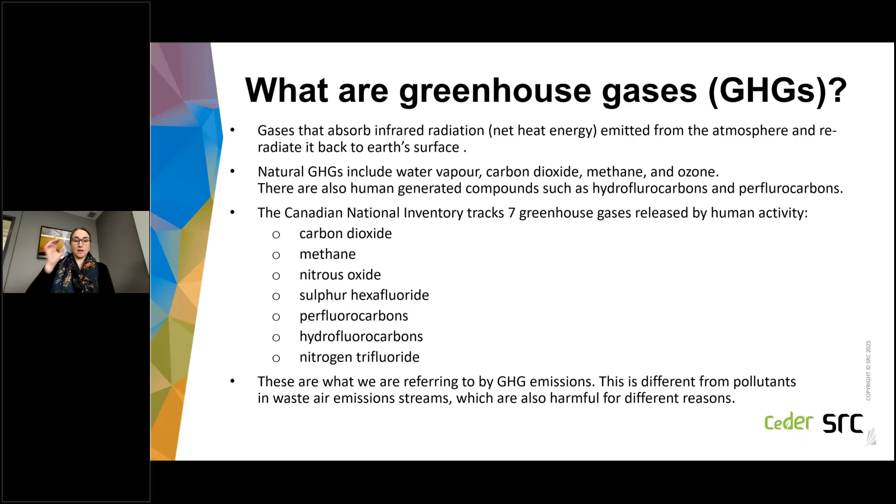So a couple of other terms I'd like to explain: climate mitigation. This involves avoiding and/or reducing emissions released into the atmosphere. Reducing those emissions can involve changing to processes or energy sources that emit less greenhouse gases, or capturing emitted GHGs to prevent their release. This can be done on an individual site basis, a project basis, a company basis, a jurisdictional basis, or an industry-wide basis. It is reducing what is in our control.

Climate adaptation, however, is the process of adjusting to actual or expected climate changes and their effects that are out of our control, in order to minimize the negative impacts and potentially take advantage of any opportunities that may arise from the scenario. So climate adaptation is focused on impacts of climate dynamics and adapting to them.

That can be related to water security. It can be related to site or industry preparedness for extreme weather like floods or fire, developing alternative vegetation plans that are adapted to new climate situations.

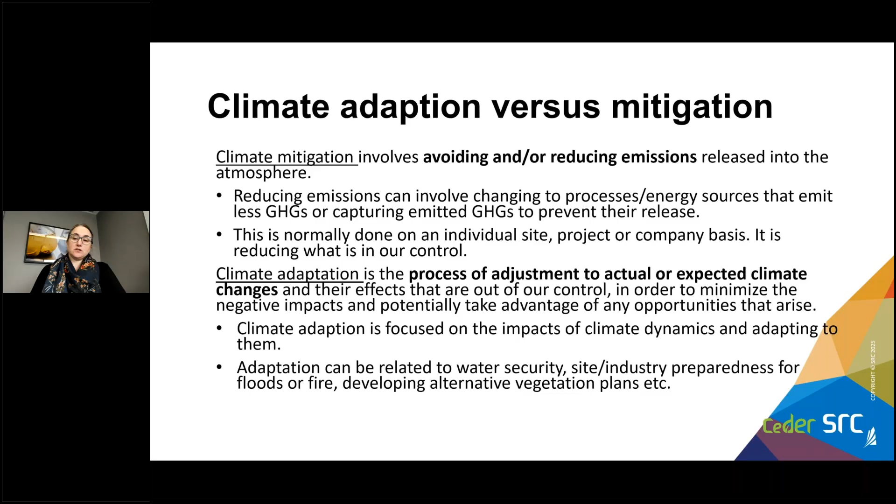So one other term I'd like to define is carbon dioxide equivalent. You might see this written as CO2e or sometimes as CO2eq. What this really is, is a basis that allows us to compare different greenhouse gases on the same basis. The formula for this is really: you take your amount of gas and multiply it by your global warming potential.

Different greenhouse gases have different global warming potentials. Often this potential is a number calculated over 100 years, though you might see numbers over 20 years. But the point here is that these different greenhouse gases have different GWP. This table here on the right shows that methane's GWP is 28 times that of carbon dioxide. So what that means is if you have the same mass of methane as carbon dioxide, the impact of that methane will be 28 times greater. This just allows us to compare different greenhouse gases on a standard basis when we're looking at our emissions.

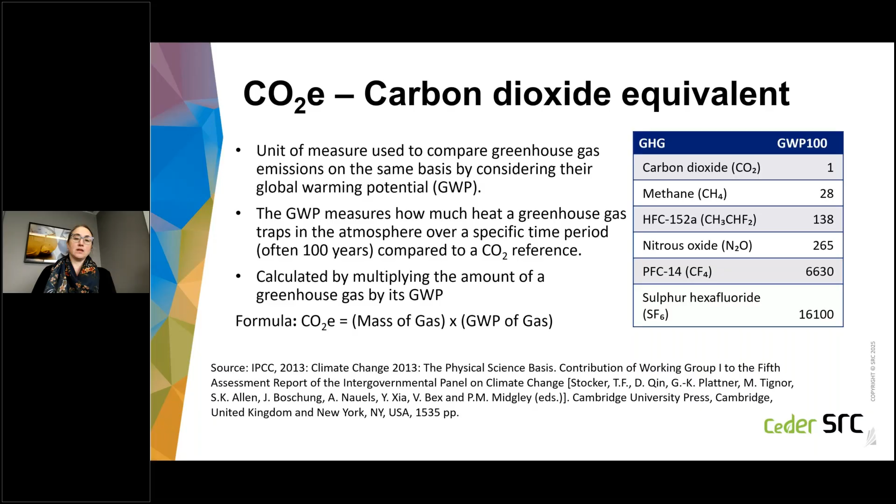So a couple of carbon reporting concepts for everybody. Carbon reporting refers to the reporting of greenhouse gas emissions using CO2 equivalent. Many jurisdictions do require reporting on greenhouse gas emissions in order to measure and claim impact of any reduction measures.

Another term you may have heard but not be familiar with is life cycle assessment, or LCA. This is a method of measuring environmental impacts across a product's life cycle, what we call a cradle to grave analysis of a product. These impacts do include greenhouse gas emissions, so part of the LCA is your carbon footprint, but it also includes energy consumption, water usage, and waste generation.

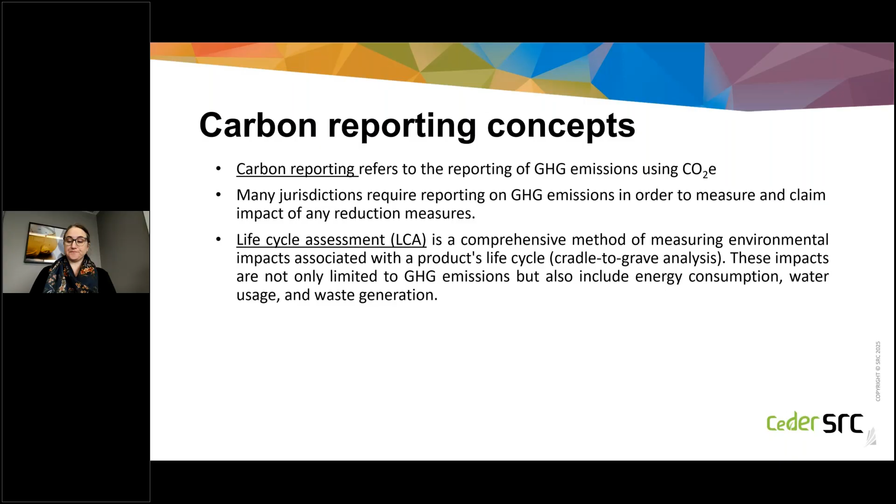One other carbon reporting concept I'd like to explain is scope 1, 2, and 3 emissions. These are categories used to describe an organization's greenhouse gas emissions footprint based on their point of origin. Scope 1 emissions are probably what people are most familiar with. These are direct emissions that are owned or controlled by a company, so they can be managed as desired.

Scope 2 emissions are actually indirect emissions. These are from purchased energy sources, such as electricity you need to purchase, energy for heat, cooling, or steam for company operations. These are typically managed by using lower carbon intensity and renewable energy sources, which is one route to reducing those types of emissions.

However, there are also scope 3 emissions. These are another source of indirect emissions from sources that are not owned or controlled by the company that's looking at their carbon reporting, such as supply chains and stakeholder relationships. The concept of scope 3 emissions can be a little bit confusing to define, so I'm going to give you an example here.

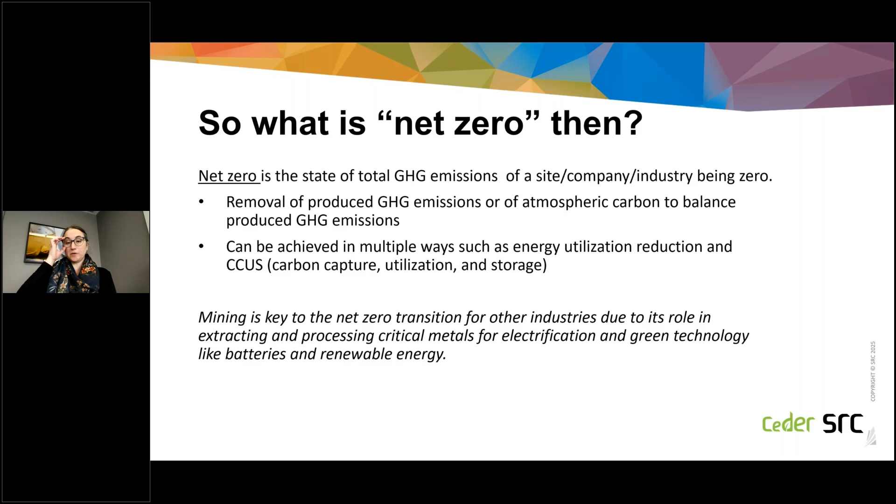So what do I mean by CCUS? That stands for carbon capture, utilization, and storage. I have it here as 'and/or storage' because although it's all one term, we are not always doing all of these steps. Capture means removing carbon dioxide either from industrial greenhouse gas emission sources—one example being flue gas from combustion—or from the atmosphere.

Utilization is taking the CO2 we've captured and using it in other processes that need CO2, or converting it to other useful products—I'll talk about examples of both in a minute. Then storage is where we safely and permanently store that CO2 over a very, very long term—what we'd look at as making permanent.

So what about the term sequestration? I'm not really going to use sequestration in this presentation because it can get a little confusing. It's often used when talking about capturing CO2 from the atmosphere for a wide range of applications, and is frequently used with biological technologies and solutions. So I won't use it here—we'll keep to capture, utilization, and storage so it's clear what type of processes we're talking about.

Canadian and mining emissions context: how large are Canada's greenhouse gas emissions? In 2022, the most recent year we have numbers for from the Government of Canada, 708 megatons of carbon dioxide equivalent was emitted—an increase of just over 1% from 2021. Total greenhouse gas emissions from heavy industry were 89 megatons of carbon dioxide equivalent, and mining is part of heavy industry, so that isn't mining alone, that's all of heavy industry.

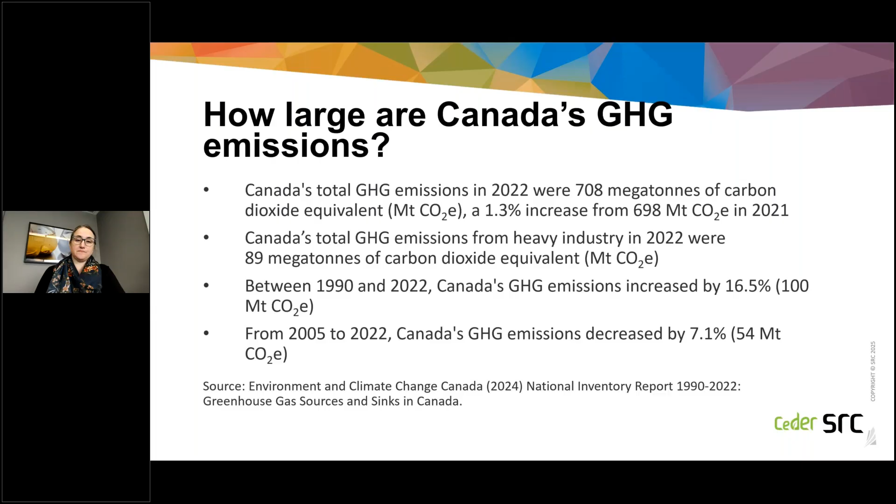So Canada's emission targets: Canadian and global regulations continue to evolve as targets become more aggressive and impact more industries. Canada has a 2030 emissions reduction plan, with the goal to achieve a 40% reduction below those 2005 levels by 2030, and net zero emissions by 2050. There are some new actions mentioned there for heavy industry, which includes mining.

Certainly additional emissions reduction efforts to decarbonize large emitters. But the other point here, which is something we're talking about in this particular webinar, is that the Government of Canada is looking for a comprehensive CCUS strategy.

They want to look at development and deployment of CCUS technologies to mitigate greenhouse gas emissions from a range of industrial sectors, which does include mining. And mining emissions are under scrutiny—public perception, stakeholders, and government are taking a look at increasing numbers of industries regarding their emissions. Also, many markets are asking for different greenhouse gas emissions data and targets. For example, if you want to sell your product to certain markets in Europe, you need to be reporting scope 1, 2, and 3 emissions as part of that product. So there are a lot of considerations even outside of existing regulations when it comes to greenhouse gas emissions targets for an individual company or industry.

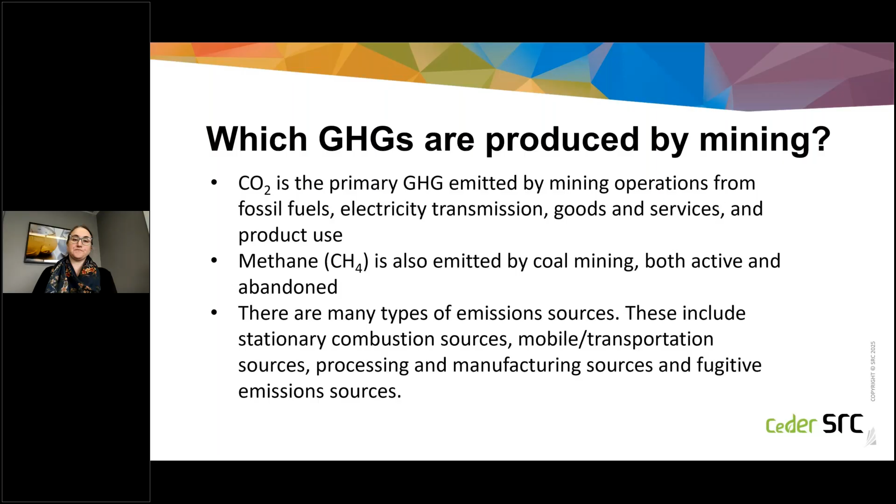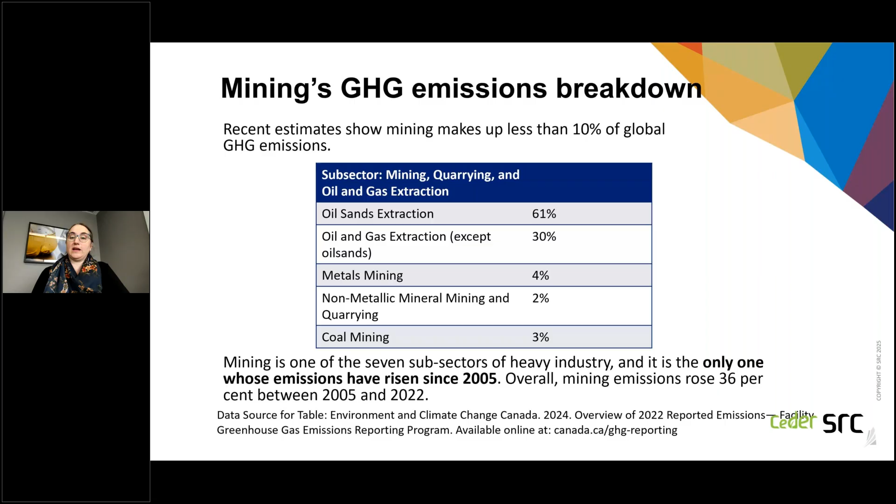One interesting thing to note is that emissions from mining have risen since 2005, while other types of emissions have been falling in Canada. Overall, they rose 36% between 2005 and 2022. So the question is, why have emissions from mining increased if industry has been investing in decarbonization and improving efficiency? In fact, emissions intensity has been reduced per unit of energy—that's the good news. But the reason we still have more emissions presently from mining is two reasons.

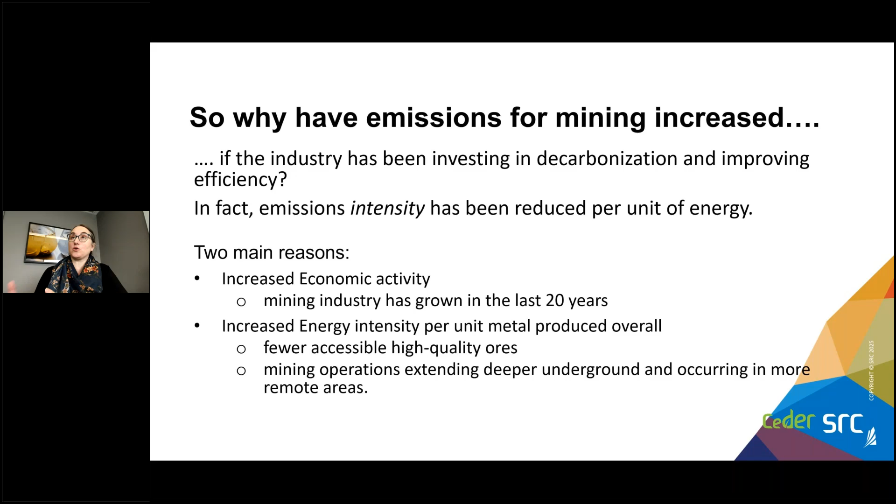Increased economic activity—the mining industry has absolutely grown significantly in the last 20 years, so we are doing more mining even if our emissions intensity is lower. And increased energy intensity per unit has also increased in many cases. We've got fewer accessible high quality ores. We have more mining operations that are extending deeper underground and occurring in more remote areas. Obviously there's some challenges with both of those that require additional energy usage.

So now moving on to decarbonization and beyond. What are we doing now in mining, and can we do more? The mining industry has definitely made progress in recent years towards decarbonization. We talked about energy intensity and emissions intensity on that last slide. Mining operations have reduced their emissions, and there's two major focuses that they've been using so far.

Looking at optimizing operations and equipment selection to minimize energy consumption, and switching to lower carbon intensity sources—so electrification and employing low carbon or net zero intensity energy sources. Finding efficiencies is an ongoing process, though, and it is especially challenging at remote mines.

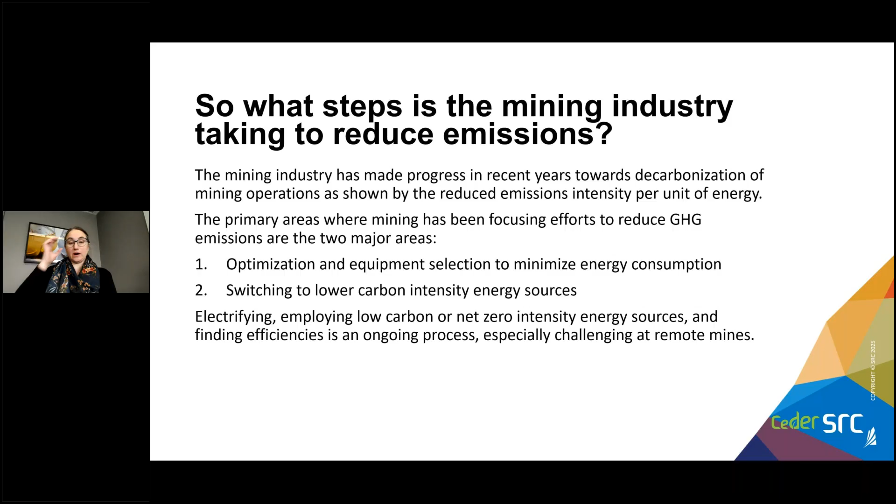So can we do more? Well, with regulations and public perception changing, we now need to look towards an integrated solution to GHG emissions reduction via more direct mitigation routes. And so that's where we bring in this capture, conversion, utilization, and storage.

Other industries have implemented these direct mitigation routes to meet regulations and targets. One example is oil and gas here in Canada with more recent methane regulations—they've been doing that through capture, utilization, and storage. Here I'm referring to CCUS because we talked about how CO2 is the primary emission for mining, but obviously you can do capture and utilization as well for methane.

Another approach is integrating industries or facilities to offset net emissions. This is where you integrate different types of industries or facilities together, where maybe one facility's waste product is another facility's feedstock, and that can be a route to reducing emissions.

Very key, what we're finding is integration of multiple strategies to optimize the resulting emissions reduction and economics. I don't want to forget about economics, and I'll bring those up again later because we always need to consider what is cost effective and practical when employing these technologies. So going forward, we can combine efficiency and low carbon energy sources with CCUS technologies to provide an integrated solution for reaching net zero.

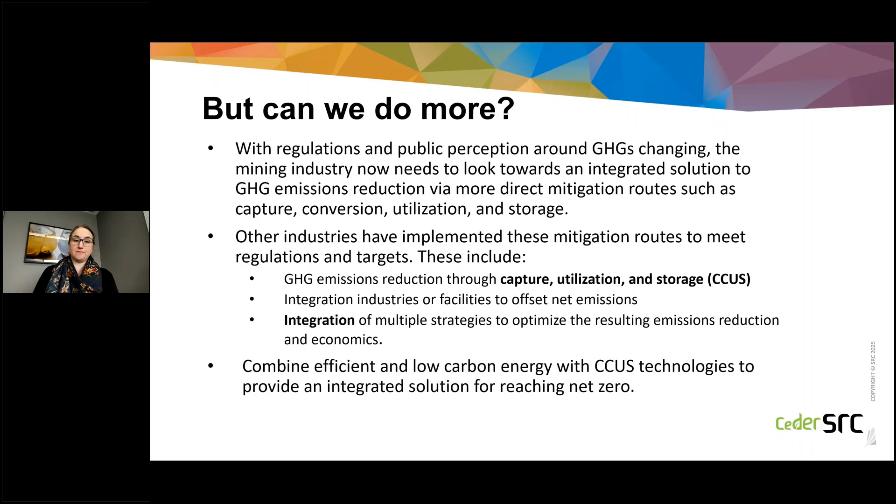Some examples of CCUS: capture of CO2. This is where we're looking at capturing industrial waste streams before they're released to the atmosphere, for example, carbon from fossil fuel combustion flue gas. These applications are simplest if you have a large point source versus a lot of small sources, so these are some of the considerations.

The other option for CO2 capture is extraction of CO2 from the atmosphere to offset produced emissions, so direct air capture. There are also quite a few land-based and ocean-based methods. I won't get into those here, but certainly accelerated weathering, afforestation, direct ocean removal, and microalgal cultivation are options for extraction of CO2 from the atmosphere.

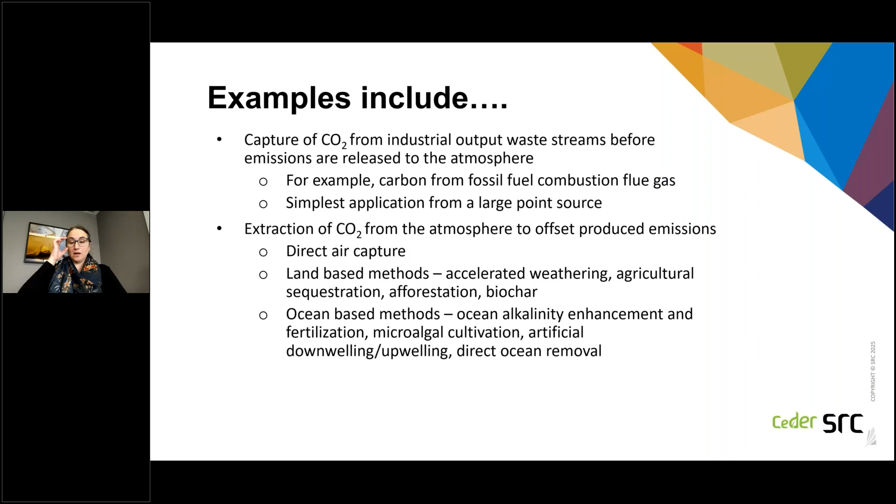I have a schematic here to sum up at a high level the approaches we can take in CCUS. We start from carbon capture, whether we're collecting our own GHG emissions or removing CO2 from the air to balance our emissions. We can take the route directly to storage, which would be geological storage long term.

The other option is utilization, that's the U in CCUS. So there's utilization for things like foods and beverages and enhanced oil recovery.

Now, the differences between storage, utilization, and conversion are sometimes not well defined. An example is enhanced oil recovery, which is utilization of CO2 to improve production from an oil and gas reservoir, but much of the CO2 actually remains in the reservoir, so it can also count as storage.

If we're not doing direct utilization, that is where we are converting - using the CO2 to make a useful product that may have value or may further offset our emissions, such as a feedstock for fuels, chemicals, and agricultural applications, to make cement, for backfill, as well as some biological approaches such as using microbes or microalgae to produce valuable products.

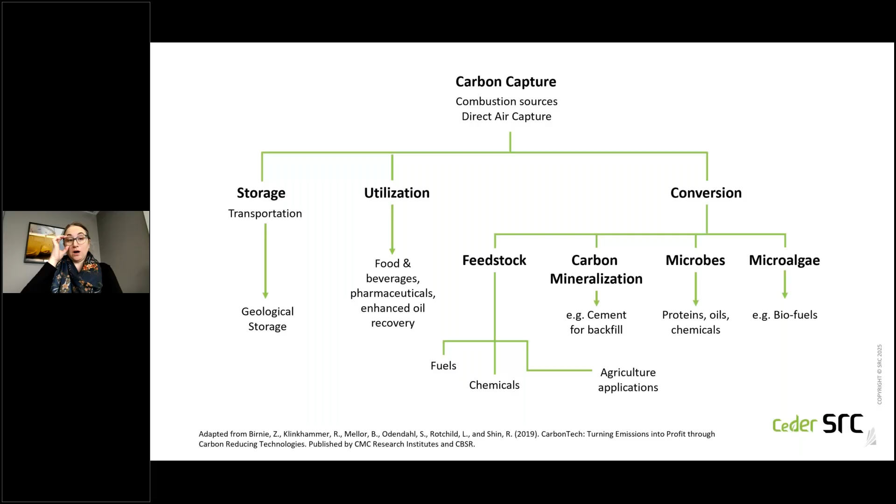On the topic of carbon utilization, I have another graph showing more examples of direct use versus indirect use. Direct use is utilization. Indirect use - we often use the term conversion - because we need to undertake some type of chemical process to convert our CO2 into something else we want to use, such as fuels, chemical intermediates, plastics, building materials, cement and concrete.

If we're using it directly, there are actually more applications than you might think: solvents for decaffeination and dry cleaning, as a heat transfer fluid, welding and medical uses, as well as, of course, yield boosting for things like greenhouses, fertilizer, and algae.

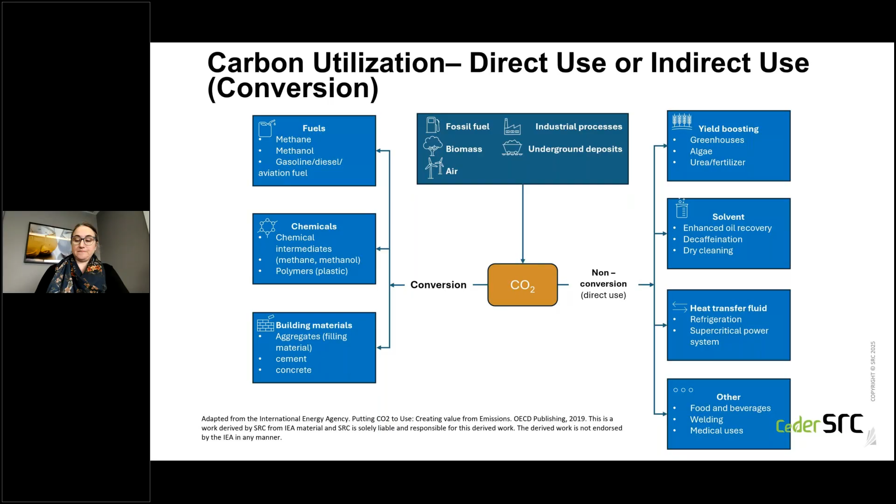We've talked about very conventional carbon storage examples - EOR plus storage, geological storage - but I did want to mention a couple of non-conventional carbon storage examples.

The first one is bioenergy plus carbon capture and storage. This involves specifically using biomass as an energy source and combining that - which is really part of the capture - with permanent storage of CO2 produced during the conversion of biomass to energy. This has multiple outputs, primarily power generation.

SRC actually recently engaged in a project similar to this for a client, where we were looking at where you would do the storage, where you'd obtain your CO2 from this biological source, and looking at mineral rights, drilling, transportation - a lot of practical applications to implementing something like this, depending on where your site is.

The last non-conventional carbon storage I wanted to mention is carbon mineralization. I have a couple of slides on this because we've had a lot of interest in carbon mineralization from the mining industry recently.

This is a natural process in which minerals take carbon dioxide from the air and create carbonate rock. This is actually a naturally occurring process, but it occurs over very long time periods, and so right now researchers are developing a way to accelerate that process in industry, especially for mining. The output there would be carbonate rock, a type of CO2 storage where CO2 is captured from the air and stored long-term in this carbonate rock output.

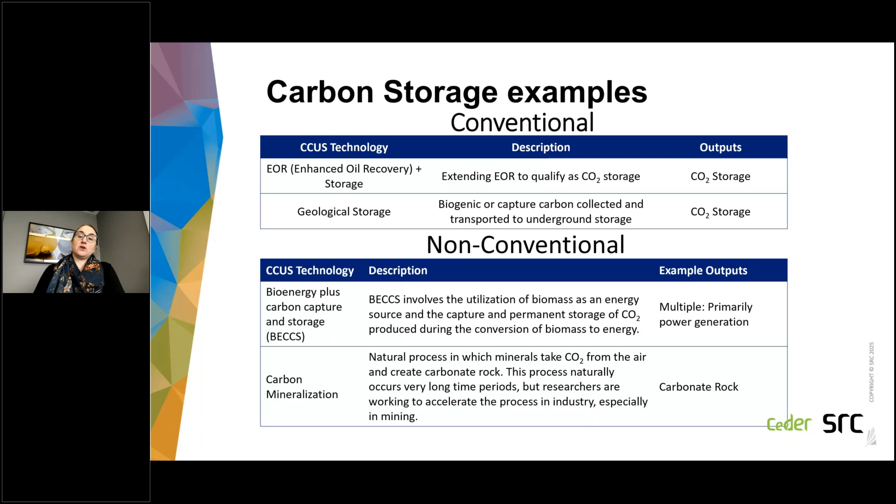So carbon mineralization. As I mentioned, it's an innovative new carbon capture and storage technology that is being researched. You may have heard it referred to as mineral carbonation, mineral sequestration, or enhanced rock weathering.

Because there's a lot of interest in this right now, I wanted to make sure we were familiar with all the terms.

This is where we have fresh surfaces of rock or minerals, and they convert carbon dioxide either from the atmosphere or from a carbon gas stream. We could use captured emissions from a site for this to mineral form. It's mineralized on the rock material, and that is potentially of all sizes, from powder to rock outcroppings.

And if carbon mineralized material is mixed with soil or at grade, it can be used by plants, bacteria. So there's a lot of research happening in this area because there's a lot of applications for this.

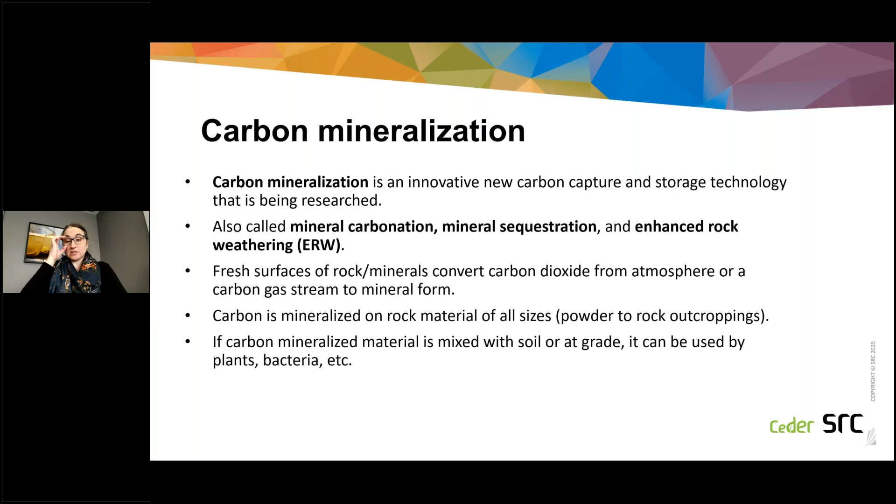Some examples of technologies presently being worked on by various parties: applying rock dust from mine tailings or aggregate operations to agricultural or residential soil, spreading rock dust along coasts for weathering with waves and tides, land farming mine tailings by tilling dry tailings material to expose it to the atmosphere, and chemical and physical processing of mine tailings with combustion exhaust to store carbon.

So what are some of the challenges to emissions reduction solutions?

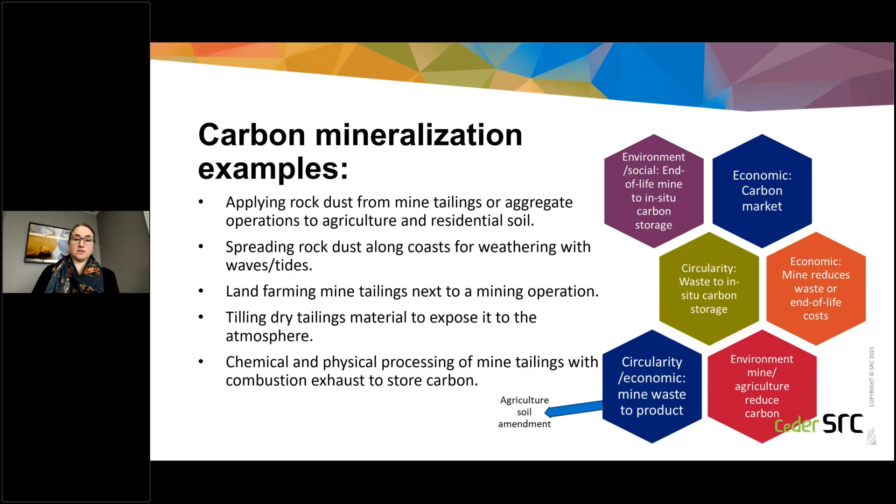Regarding GHG emissions mitigation challenges, one of the primary ones is the temporal nature of operations. We can often have a very intermittent greenhouse gas emissions flow. We don't always have the same amount of gas from day to day, hour to hour, month to month.

We can have low variable quality gas. Depending what you want to use your emissions for, the composition does matter. We can have low volumes, we can have low gas pressures. Geographically isolated locations can be a challenge, and lack of access to infrastructure for implementing mitigation solutions.

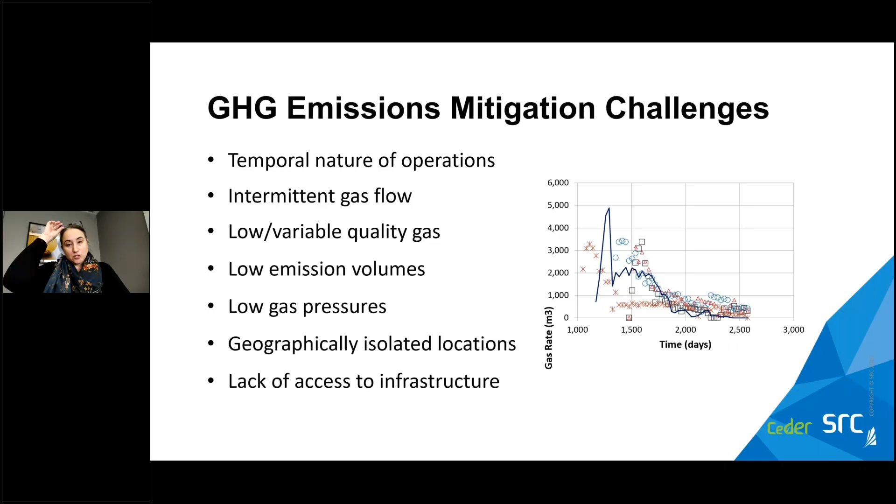So before we get into how we're going to mitigate these, we need to talk about measuring and identifying our sources. And there are a lot of challenges with this.

All sources may not be easily identifiable or quantifiable. Data availability may be limited and the quality of the data may be poor. There's a lot of variability in emissions, and measuring and monitoring can be quite challenging.

There are practical issues. Standards and methodologies are not available for all types of emissions. There are a wide range of standards and methodologies, and so we may need to develop and validate new ones depending on the scenario.

And then how accurate does our measurement need to be? It depends on what we're trying to accomplish, and how accurate it needs to be impacts how we need to measure those emissions on a site.

Also, incorporating shared emissions can be complicated. For example, those scope 3 emissions I talked about, where we're talking about upstream and downstream activities, can be particularly challenging because of the complexity of tracking emissions across the entire value chain and the various stakeholders involved.

So I want to give an example. This is actually an example from oil and gas. They've done a lot of work in recent years around their emissions. I just have a very simple schematic here of a very generic well site.

We have our wellhead, we have an emulsion tank, we have a truck that would be collecting emulsions and taking them to a treatment facility. And as you can see, it's not so simple to determine what our greenhouse gas emissions are.

You've got casing gas from the wellhead. That gas can be vented directly to the atmosphere if that's allowed. It may be going to a flare or a combustor. It might be getting gathered to go to a pipeline, depending on where you're located.

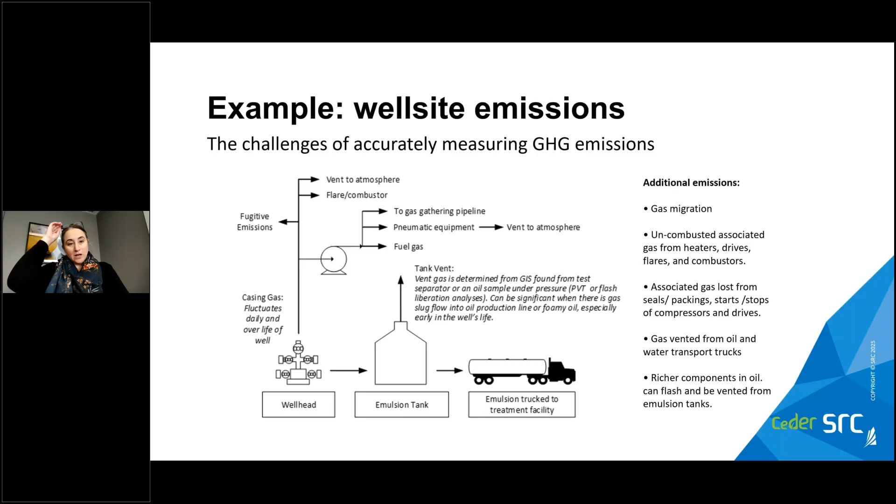So when I talked about how complex measurement can be, I wanted to share this table with you. If you look at Canada's Facility Greenhouse Gas Emissions Reporting Program, these are large emitters that need to report to the Canadian government. You can see there are 5 primary methods that various industries and reporting companies are using for measurement. There's a large range. Different methods are accepted, different methods are appropriate, and there isn't necessarily one standard that's acceptable at this time, depending on the industry you're working with. So a lot of work still needs to go into effective measurement.

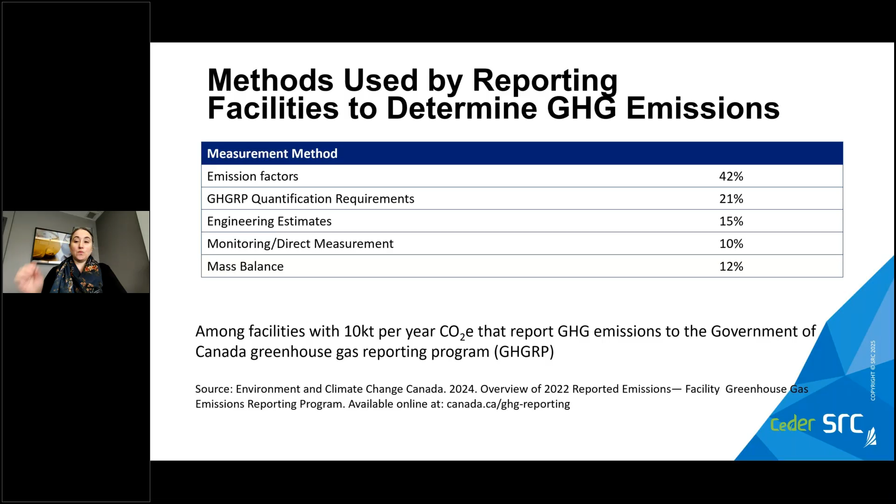So what can we do about measuring emissions under these conditions? Well, we can improve data collection processes. We can refine emission factor selection if you are using emission factors, and many industries do need to, with unknown emissions. We can enhance measurement and monitoring techniques. We can develop and validate new measurement protocols. We can employ advanced monitoring systems that can be left in place and monitor remotely so that we can collect data over a long period of time to make the best emissions reductions decisions.

We can look at more cost-effective techniques. And then, what is very important as well that we found is impartial third-party verification can be very important when you're reporting emissions, depending on who the audience is for that information.

So let's talk about - okay, now we've figured out what our emissions are, we've measured them, we've determined what we need to reduce at a particular site for a particular company, but how are we going to determine what the best emissions reduction solution is? Obviously we have to identify the emission sources we want to consider. So which emissions are within scope? Are we starting with the site? Are we dealing with our entire company? Are we dealing with the entire industry?

We need to measure those emissions where possible. Sometimes it's very challenging and we have to make some assumptions or use some different methodologies to get that information. We need to identify our emissions target for reduction. Are we aiming for the 40% reduction by 2030? Are we trying to get to net zero? Then the next step, once we know what our goals are and what we have for emission sources, is...

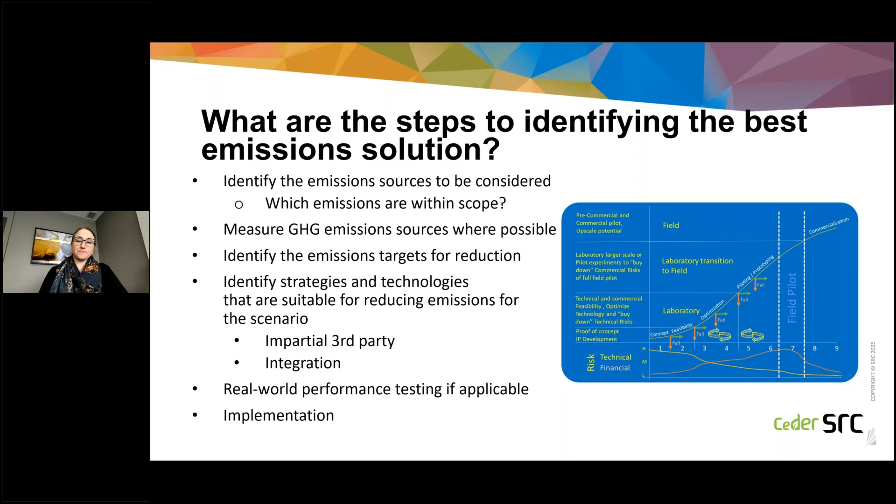Some of the critical considerations when we're determining what solution will best meet our needs, as I've mentioned, are the emission source type, volumes and flow rates, material composition, variability. But other important considerations are the location of the site we're looking at, any transportation logistics if we're removing things from the site, for example emissions products or the CO2 itself, if we need to bring in feedstock for inputs, if we're doing some type of conversion, and where's our market end user for any outputs we might have.

And then the other key thing is we can never forget economics. So what is the capital cost of the solution? What is the operating cost going to be on an ongoing basis? What will the carbon credits be? That can offset those costs, so that would count actually as a revenue. Carbon credits are expected to increase over time, making things more economical, and any CCUS revenues - so what I mean by that is if we're making a product we can sell by using our conversion technology, then there could be revenues there as well to offset the cost of implementing the solution.

What infrastructure do we have, or what will we need to build? What are the local regulations, and what additional labor will we need?

So I have an example here of a net zero emissions integrated solution. This was a project where we were involved in assessing and integrating technology for a zero emissions oil site that was being developed. This was an existing operational site that was to be modified.

We employed advanced remote electrical monitoring so we can identify optimum energy options and efficiencies. We implemented a hybrid system, with renewable electrical power and storage, so a microgrid on site.

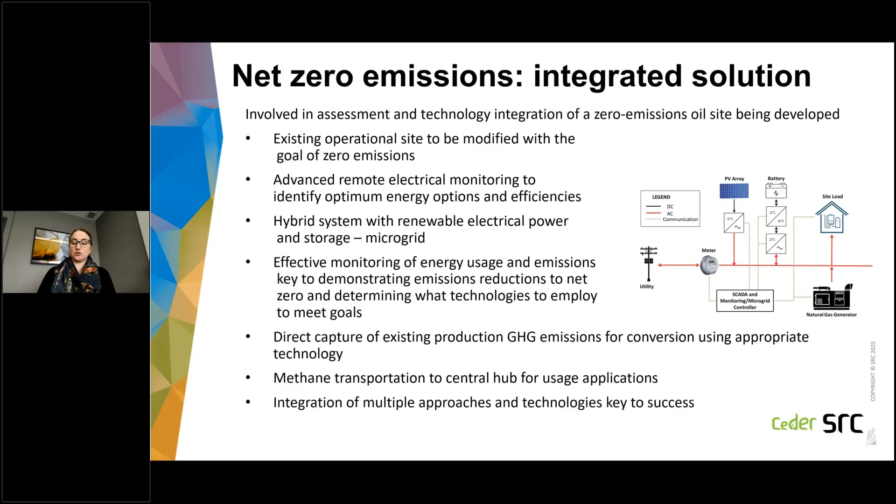Using appropriate technologies, we had direct capture and usage on site. Also, in this case, methane transportation off site to a central hub. The integration of all of these approaches is really what is key to success if you're looking to achieve net zero. So it's not just that one solution.

So what are some of the lessons we have learned from other industries? I've already talked a little bit about this because I gave you two oil and gas examples. SRC has done a lot of work on the oil and gas front in the last few years around greenhouse gas emissions. So what have we learned from that?

Number one, you cannot mitigate what you cannot measure or don't know about. So we have to be able to measure those greenhouse gas emissions, and we have to know what they are if we're going to demonstrate an improvement when we implement our best solution. And also, we need to know what those are to determine that best solution.

One size does not fit all. There's not one technological solution that will solve everybody's greenhouse gas emissions reductions. We need to really look at each situation on a case-by-case basis.

We've also learned that emissions profiles can be vastly different even between sites with similar operations, so those differences do need to be looked at as we're implementing solutions. The integrated solution of methodologies and technologies can best overcome challenges in meeting emissions targets.

So again, I'm back to integration. I know I've said it a bunch of times, but it isn't that one size fits all. We need to look at the optimization. We need to look at technology, equipment selection on site. We need to look at low carbon energy sources, and we need to look at direct capture, utilization, and storage to meet all of our targets.

We've also found that impartial third-party assessment is critical to success. There are a lot of approaches, there are a lot of technologies out there, there's a vast landscape, and that impartial third party can be very helpful in determining what is best to help a specific client.

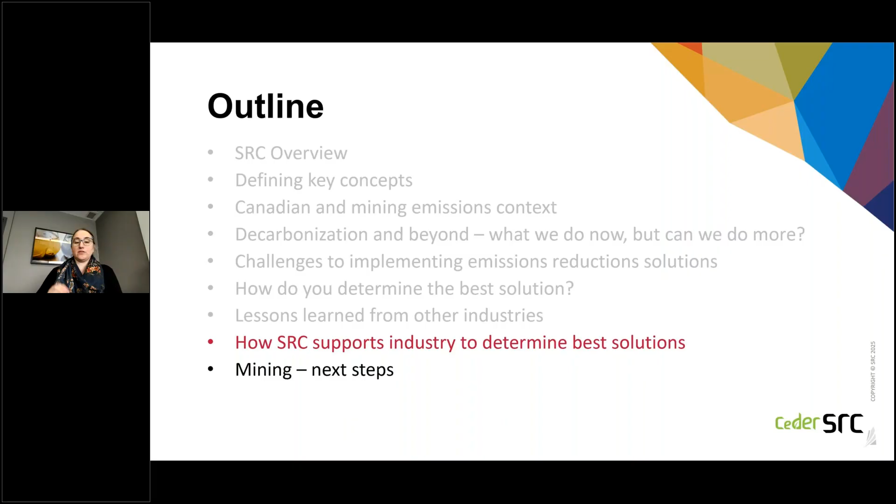So I'm going to talk a little bit, just briefly here at the end, about how SRC specifically supports industry to determine the best solutions. I have touched on this here and there in the presentation, but I'd just like to summarize that for you now. SRC does provide services as what we call a catalyst for your energy transition.

So across a wide range of industries, we are providing these energy transition services: emerging energy technologies, integrated energy systems, energy evolution, so how we're using energy has changed. One aspect of that is SRC's Centre for the Demonstration of Emissions Reductions, which we refer to as CeDER. You will have seen the little green logo in the bottom corner of all my slides, and I'll talk a little bit about CeDER in a minute.

CCUS, and then climate adaptation planning. I did mention climate adaptation earlier in the presentation.

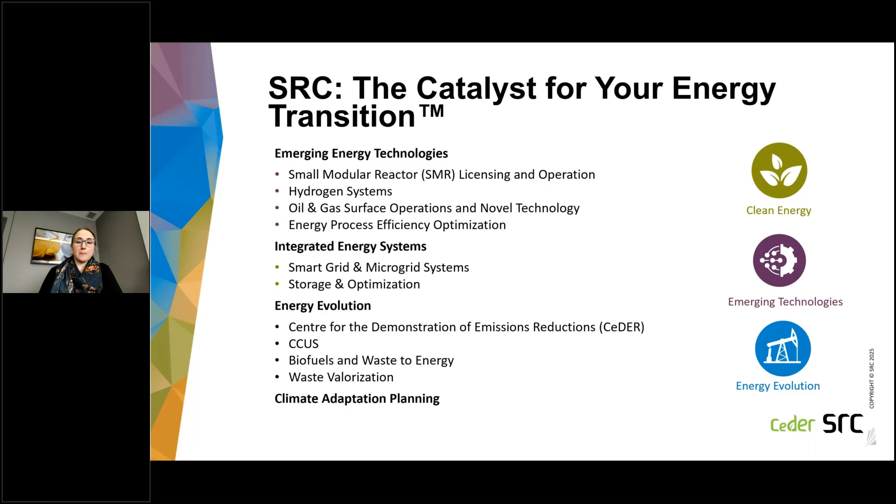So what are the approaches that SRC takes in helping industry with various emission reductions? There are five we employ: optimization of processes, technology, and equipment selection to minimize energy consumption; switching to lower carbon energy sources; direct emissions reduction through capture, utilization, and storage; integration of facilities and industries to offset net emissions; and integration of multiple strategies—all of the above as appropriate to optimize the resulting emissions reductions and economics.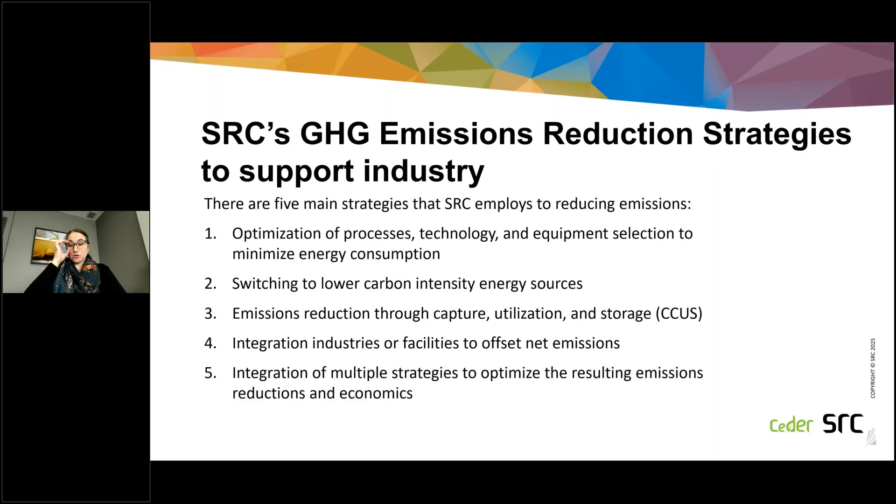So just a little bit more about these different strategies at SRC. So process optimization and energy efficient technology.

Key mining initiatives we've successfully implemented to reduce energy intensity include innovative technological developments, equipment selection and process control optimization, and data-driven approaches to decision making. There are various groups at the Saskatchewan Research Council supporting optimization technology development in this area, including minerals processing, hydrometallurgy, pre-concentration and sensor-based sorting, multi-phase flow, and advanced instrumentation development, all contributing to optimization and energy efficiency for mining at SRC.

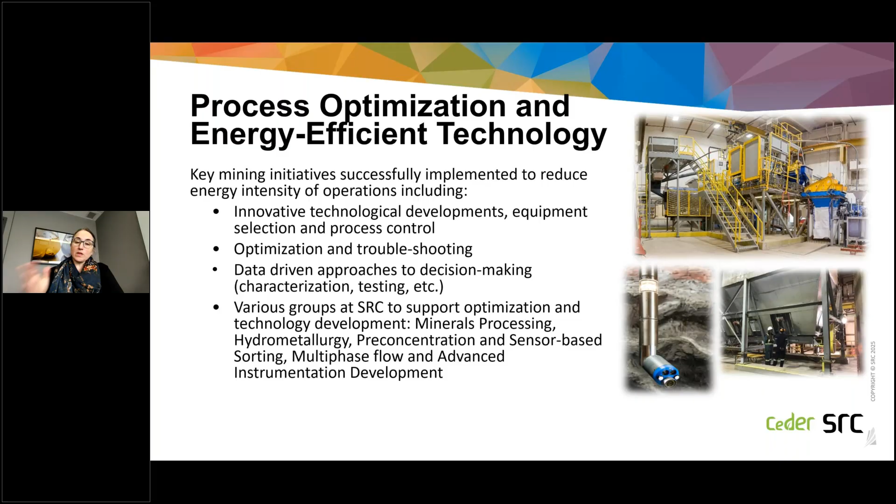Regarding reduced carbon intensity energy sources, this one is also very key for mining, and I know many of you are already engaged in this. Mining, across the whole cycle, involves significant electricity and fossil fuel use by necessity in extraction, transportation, and processing.

Some of the lower carbon energy sources we've been working with include wind, solar, biofuels, and converted waste. These technologies have been successfully integrated for our clients with other conventional energy sources and battery storage—taking the low carbon sources, using conventional energy as backup storage, and putting that all together as a hybrid solution to meet energy needs with lower carbon intensity.

These alternative energy options are based on the operational scenario, existing infrastructure, and site access. The economics, required infrastructure, energy supply, and efficiencies of these energy conversions across the mining cycle continue to require expert support, which SRC can provide.

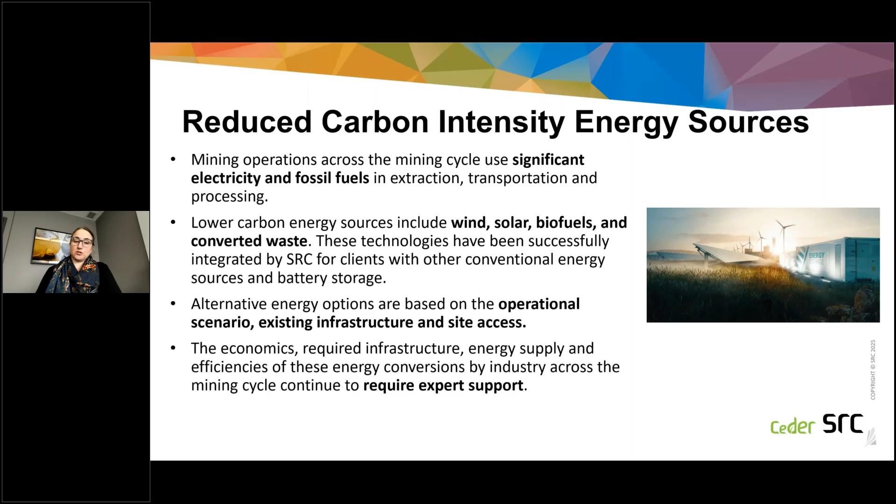As I mentioned, we have increasing concern around emissions reductions from mining and changes to public perception and regulations. We're implementing multiple strategies at SRC to reduce emissions across the mining cycle—an integrated approach to reduce costs, energy usage, and emissions. CCUS is the next step for mining to move towards net zero emissions. We can think of CCUS as another tool in the greenhouse gas emissions reductions toolbox that we're adding in.

That brings me to SRC's Center for the Demonstration of Emissions Reductions, CeDER. It's a unique program combining our world-class expertise in mining across the mining cycle, process optimization, clean and renewable energy, and emissions reductions.

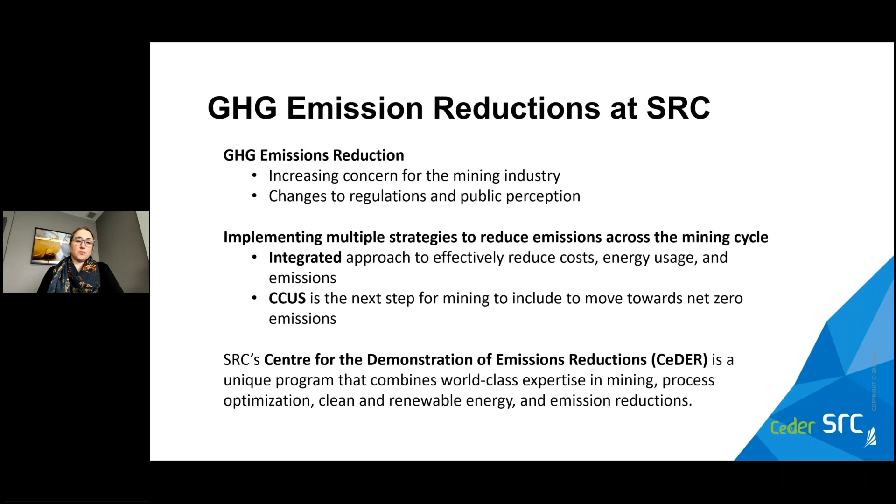I want to mention one other point briefly before we get to the end of the presentation around CeDER: we also have mobile facilities that can come out on site for measurement or real world performance testing of methodologies, measurement, or CCUS technologies. CeDER was developed to provide real world selection, assessment, testing, and demonstration of these technologies. It's independent third-party validation, and it accelerates industry adoption of practical emissions reduction technologies.

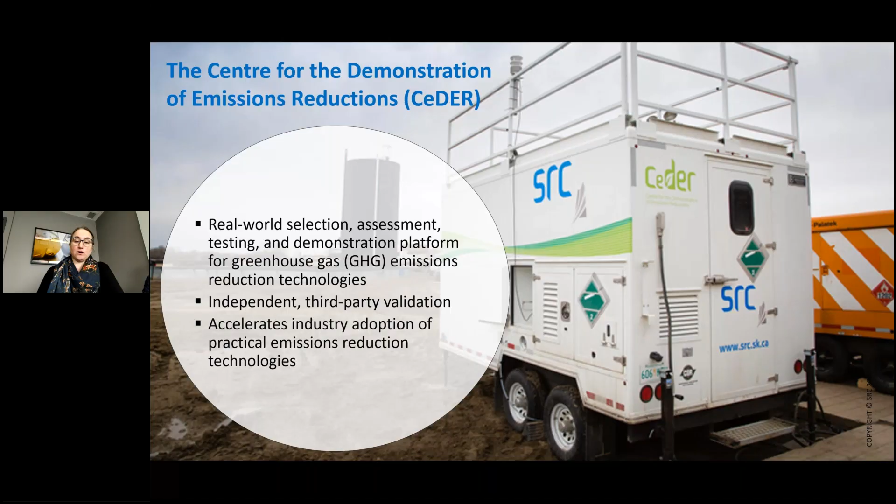The very last part of my presentation is the next steps for mining. To sum up, determining the best approach after the sources of greenhouse gas emissions are identified can be challenging—whether that's CCUS, lower carbon energy, optimization, or energy efficiency—and choosing the optimal solution to meet mining's greenhouse gas mitigation needs is going to be complex.

Integration of multiple emissions reduction strategies is key to success. One method or one technology does not fit all. An impartial third party like SRC can be critical to navigating the landscape of competing technologies and approaches. There are a lot of options out there, and it can be tricky to know how best to proceed.